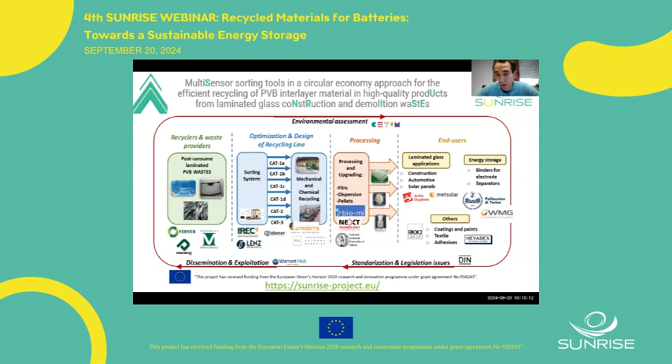This webinar will be about recycled materials for batteries. Indeed, batteries are a powerful tool to reach the energy transition and promote the sustainability of modern society. But for real sustainability, we have to take into consideration the materials and the processes for the production, use, and disposal after use of these devices.

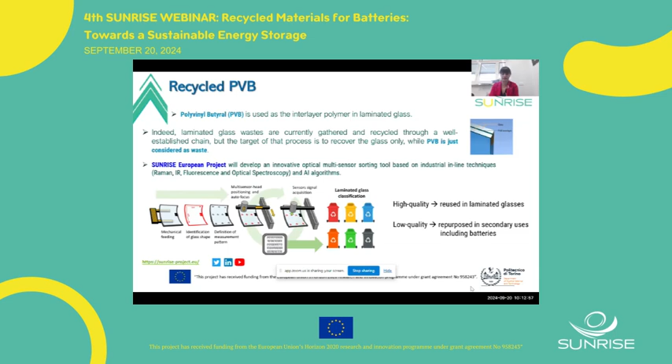We received some recycled PVB, provided by Lurederra, our partner in Spain. They provided this recycled PVB through some mechanical process, and the molecular weight, the OH percentage, and plasticizer content of this recycled PVB in different categories were determined.

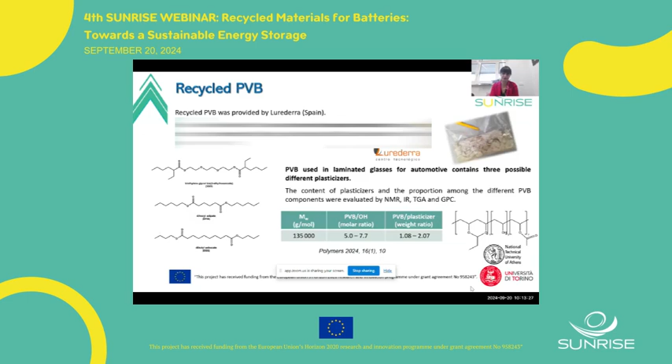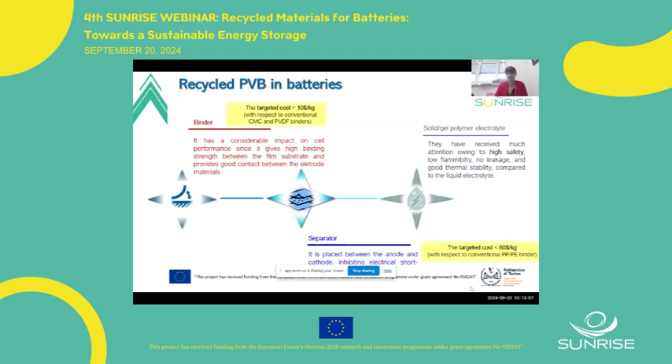Our goal as a partner in Sunrise is to use this recycled PVB as a versatile material, serving as binder, separator, and finally solid or gel polymer electrolyte. So in this presentation, I'll show results regarding first PVB as binder, then as separator, and finally as solid polymer electrolyte.

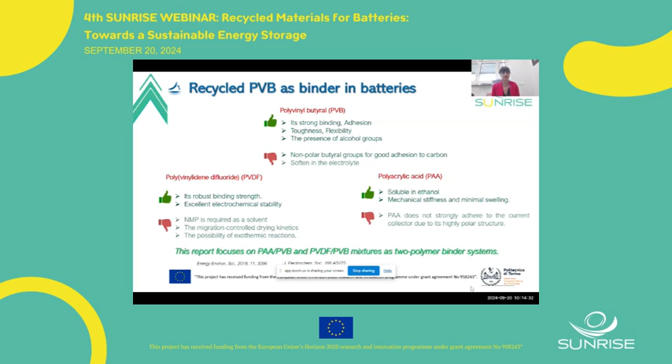First, using PVB as binder. While PVB has numerous advantages to be used as a binder, it cannot be used independently in the electrode composition. So this report focuses on a mixture of 20% PVB with other polymers like PAA and PVDF. We used PAA-PVB and PVDF-PVB mixtures as two polymer binder systems.

For sodium-ion batteries, we made some laminates based on commercial hard carbon, 90%, 5% conductive carbon, and 5% binder. The laminates were based on just PAA, the mixture of PAA-PVB at 80-20% ratio, PVDF, and then the mixture of PVDF-PVB at 80-20%. It is well known that hard carbon cannot be commercialized due to two problems: first, poor rate performance, and second, poor initial Coulombic efficiency.

As we can see, the performance of the laminate with the PAA-PVB mixture at 80-20%, the green one, shows the best performance in terms of rate capability from low C-rate to high C-rate, and also shows a very high initial Coulombic efficiency of around 87%. That is very good. However, for PVDF-PVB, the mixture shows worse electrochemical performance, the black one, especially at high C-rate. So we can consider the PAA-PVB 80-20% an efficient two polymer binder system, showing very good rate performance and very good initial Coulombic efficiency.

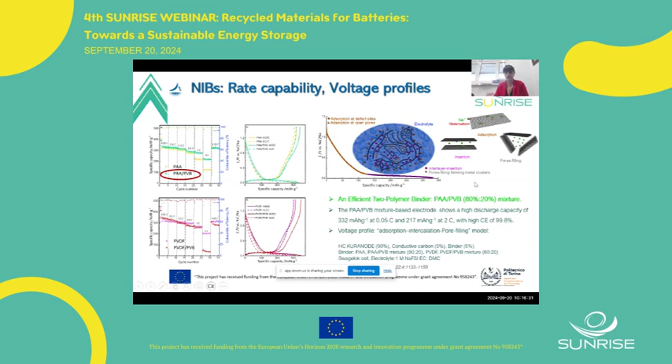The voltage profile of all the electrodes is shown, and we can see that in the sloping region we have adsorption, while in the plateau we have interlayer insertion and pore filling process for all the electrodes. The cyclic voltammetry for PAA and then the mixture of PAA-PVB is shown, which is in good agreement with the voltage profile shown in the previous slide.

Regarding the initial irreversible process, the PAA-PVB showed the lesser irreversible peak, which is in good agreement with the better initial Coulombic efficiency of this electrode. We also evaluated the cycling performance over around 800 cycles, and this electrode shows a capacity retention of around 79%, with very high initial Coulombic efficiency of 87%, and upon cycling the Coulombic efficiency reached 99.9%. That is a very good result.

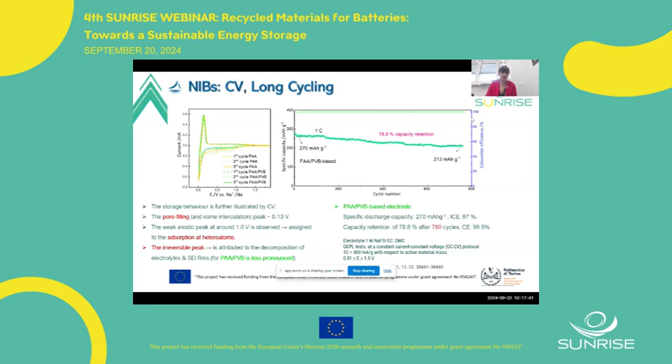I should mention that all of these were tried first with commercial PVB. Then I will also show results with the recycled one.

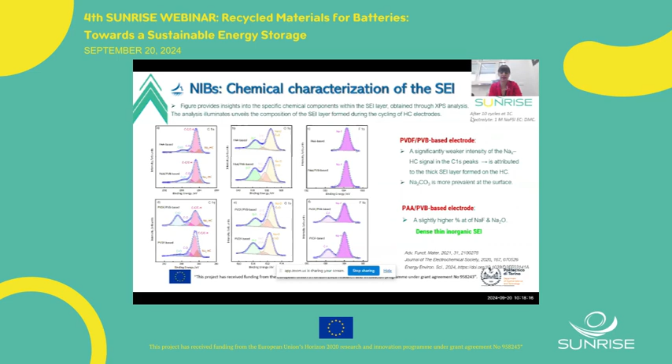In order to analyze the SEI, the passivation layer of all electrodes after cycling, we washed the electrodes and made some XPS measurements. We understood that the PAA PVB based electrode has a dense and thin SEI, while the PVDF PVB based electrode has a thicker SEI, which is why it shows worse electrochemical performance.

All the measurements were also performed for hard carbon with all laminates for lithium-ion batteries. As we can see, the PAA PVB based electrode at 80-20%, shown in green, shows the best performance from low C rate to high C rate, and also a very high initial Coulombic efficiency of around 74%, but upon cycling it reached near 100%, 99.9%.

Also, we tried to increase the amount of PVB to 50%, meaning PAA PVB 50-50%, but as you can see, the gray one, we lost a lot of capacity during the initial cycle. So it's not a good idea to increase the amount of PVB to 50%.

So again, an efficient two-polymer binder system is PAA PVB 80-20%. We also tried to evaluate the long cycling performance of this electrode, and as shown at 1C, the cell shows high specific capacity, very good initial Coulombic efficiency, and capacity retention of around 81% upon 850 cycles.

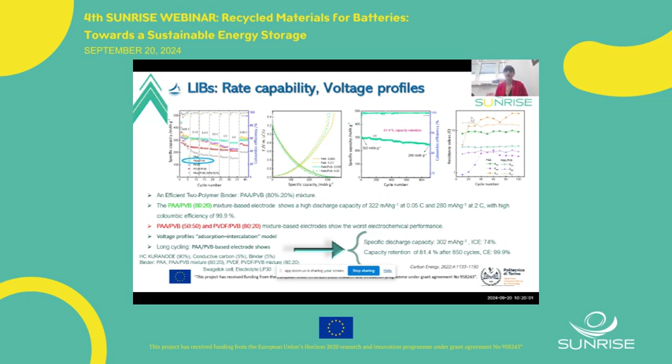The interfacial properties of the electrodes were also evaluated by impedance, and we understood that the PAA PVB based electrode has a more stable interfacial behavior.

Then we tried the characterization with recycled PVB that we obtained from Loureiro, our partner. As shown in the picture, it is the recycled PVB with some plasticizers, and we tried to make a laminate, again 90% hard carbon, 5% conductive carbon, and 5% binder with PAA and recycled PVB 80-20%.

As shown, the green represents lithium-ion batteries and the blue represents sodium-ion batteries. We can see that both electrodes show very good specific capacity, high specific capacity, and good rate performance from low C rate to high C rate.

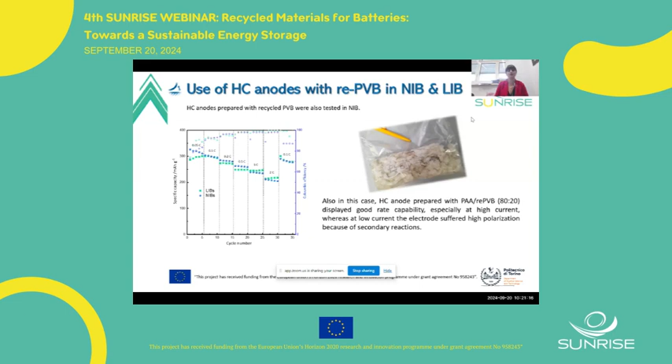However, we have some polarization during the initial cycle at low C rate, which could be due to the presence of some plasticizers. However, the results are promising for both sodium and lithium-ion batteries.

Now for the second part, we also used PVB as a membrane. In this case, we mix the PVB with NMP, add some isocyanate in a very low amount, and then let the solution stir to obtain a very uniform solution.

Then we increase the temperature up to 70 degrees. The slurry, the solution, is cast on the glass with a doctor blade, followed by immersion in the coagulation bath. Depending on the coagulation bath, we achieve two different morphologies, porous and dense, separated.

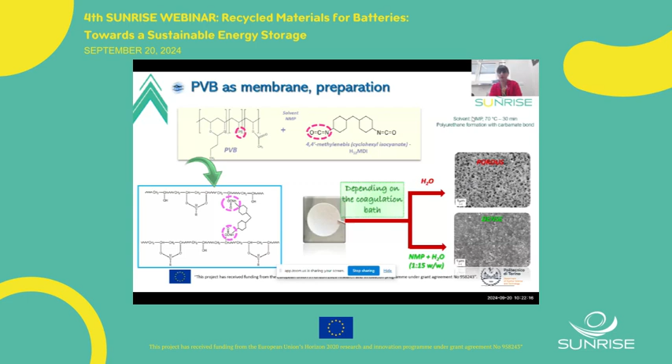So we tried to do some characterization. Some of them are shown, like uptake test, ionic conductivity, electrochemical stability window, which are very important for characterization of the separator. We tried to compare the performance with Celgard, the commercial separator.

Regarding the uptake test, the prepared membrane with PVB shows even higher uptake than the Celgard membrane. Regarding ionic conductivity, characterized by impedance, both porous and dense membranes show ionic conductivity comparable with Celgard.

And also the electrochemical stability window, which is very important for the separator, we can see that the separator is stable up to 4.7 volts.

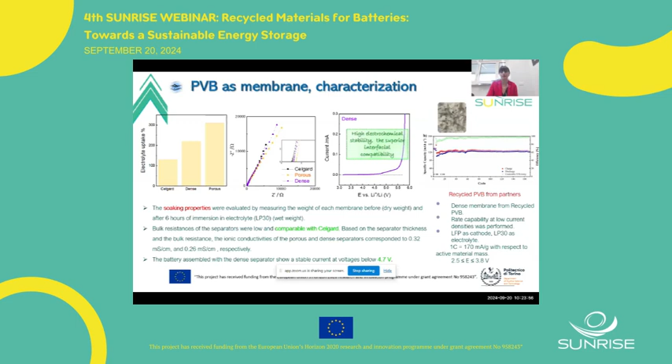We also obtained recycled PVB from the partner Loureiro, and we tried to make the membrane and do all the characterization again with the recycled one. We tried it in a half cell for lithium-ion batteries with LFP as cathode and lithium as anode, and as you can see, we could achieve quite promising performance with the recycled membrane.

At the end, I show the result regarding PVB as a solid polymer electrolyte. We use the solvent-free process, which is a promising and good process to make the solid polymer electrolyte membrane. In this case, we mixed PEO PVB with lithium salt.

The ratio is PEO to lithium salt at 15:1 and 21:1, with different percentages of PVB, 3% and 10% PVB. Then we mixed them without any solvent, followed by hot pressing at 80 degrees. Then in a symmetric lithium cell, we made some impedance measurements.

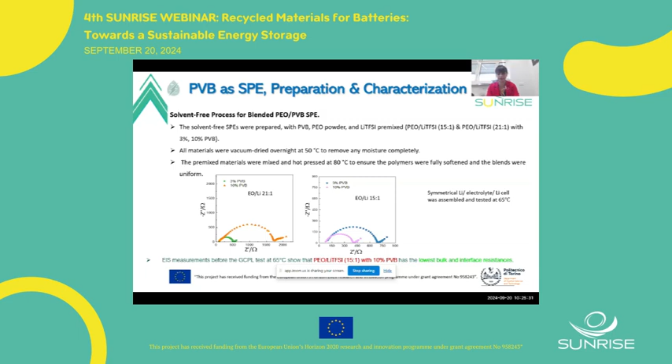As shown for PEO lithium 21:1 and PEO lithium 15:1, the PEO lithium 15:1 with 10% PVB, the purple one, shows the lowest bulk and interface resistance. So in terms of impedance, we understood that 10% PVB with PEO lithium 15:1 is the best percentage, showing the best promising performance.

Also, we performed stripping plating in the symmetric lithium cell at 65 degrees, and as we can see, again the PEO lithium 15:1 with 10% PVB showed the lowest overpotential value and very stable behavior upon very long cycling.

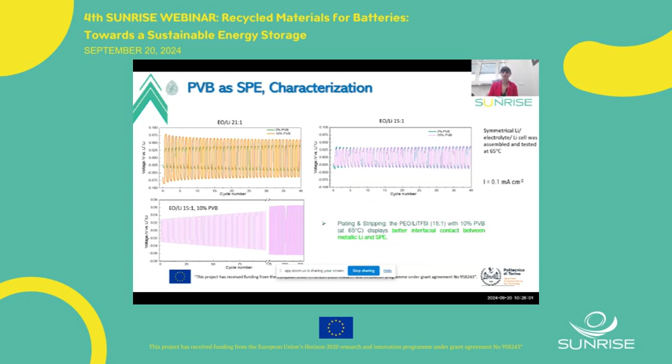As a conclusion, we tried to use PVB as binder, separator, and solid polymer electrolyte. For the binder, the mixture of PAA and PVB at 80-20% is the best composition, showing it could enhance the rate performance and initial Coulombic efficiency, good for both lithium and sodium-ion batteries.

Regarding using PVB as a polymeric separator, we could successfully prepare for lithium-ion batteries a light and thin PVB dense membrane, which has a good uptake percentage, ionic conductivity, and is very stable electrochemically. At the end, we also made PVB as a solid polymer electrolyte to avoid using liquid electrolyte due to problems of explosion and fire.

We could understand that we can enhance the electrochemical performance by adjusting the salt concentration and also by changing the percentage of PVB.

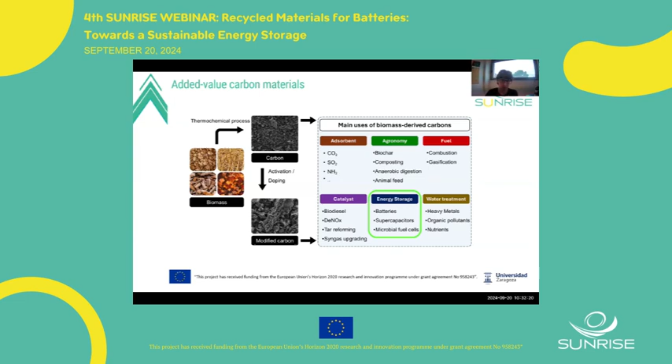Regarding the energy context and why we need to develop new battery systems: we have problems with global warming, the shortage of natural resources, and increasing energy demand. So we need to implement more renewable energy sources, and we need to store the energy produced through intermittent renewable sources, such as wind or sun, to be used when we need it.

Among other kinds of storage systems, there is the possibility to implement grid-scale battery storage systems. For now, as you know, the main batteries are lithium-ion ones, but they have issues such as limited resources, not only for lithium but also for other key materials like cobalt or natural graphite.

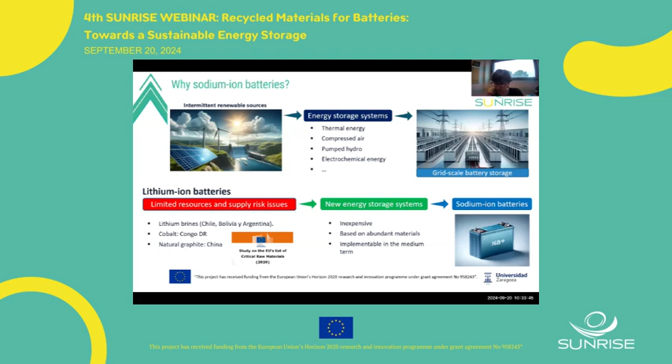So it's mandatory to develop new energy storage systems if we want to implement this kind of grid-scale battery storage for intermittent renewable sources. Among other alternatives, the most studied and most promising ones, as Hamid said before, are sodium-ion batteries. And among other challenges, one of the main bottlenecks to apply this kind of technology is the development of high-performance hard carbon anodes.

And for that, we need to rationally design this kind of carbon, taking into account the different sodium ion storage mechanisms. It's known that sodium can be stored in hard carbon through three different mechanisms: intercalation between the graphitic or pseudo-graphitic domains, adsorption in the functional groups and defects on the surface of the carbon, and also filling inside the porosity of the hard carbon.

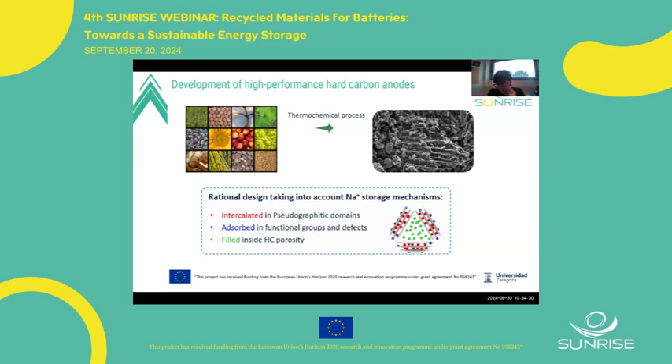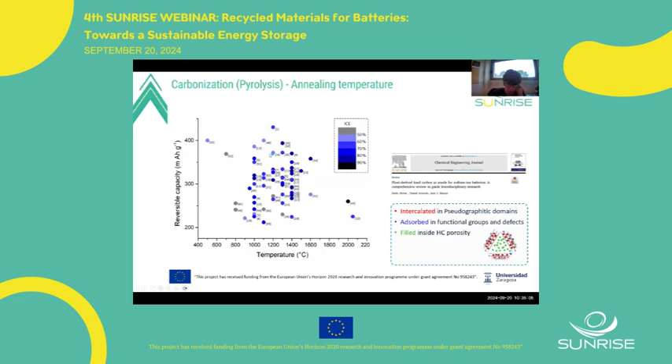So taking that into account, there are different studies in the literature. Here is a summary using different carbonization temperatures, making pyrolysis to the biomass to produce hard carbons. Depending on the biomass you choose and the temperature you select, there are different reversible capacities of the active material, so we need to optimize it for each kind of biomass. But we can also tune the hard carbon properties to improve the performance in batteries.

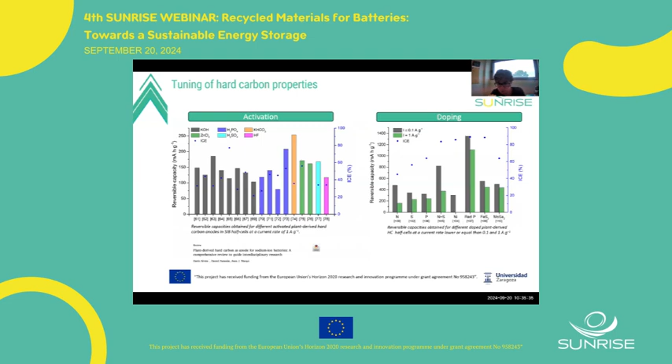For example, performing some activation with chemical agents, or also doping the hard carbon with heteroatoms or some metals, in order to improve the conductivity of the hard carbon and also to provide more active sites in which sodium ions can be stored during the cycling of the battery.

And I want to emphasize another kind of carbonization method to produce hard carbons, which is the hydrothermal carbonization of biomass. For now it was mainly studied to produce hard carbon from synthetic organic precursors, but we think there is great potential to use it with biomass wastes or agronomical wastes.

This process consists of the carbonization of the biomass in a closed vessel with water, mainly water, at low temperatures and under autogenous pressure. Inside, several reactions take place, such as hydrolysis, dehydration, decarboxylation, and polymerization reactions.

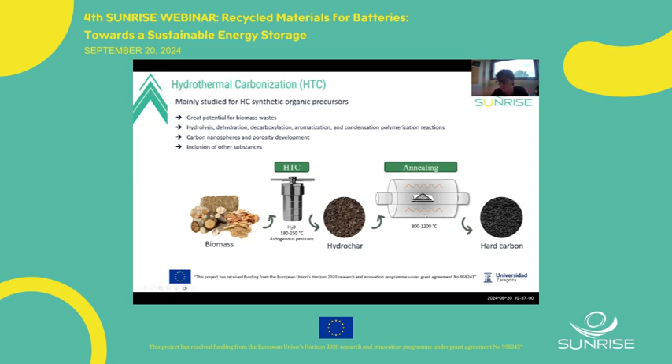And that gives rise to different morphologies in the carbon, such as the appearance of carbon nanospheres, and also the development of porosity. This process also allows us to include other substances to dope the hard carbon, for example metals. Then it's compulsory to perform another pyrolysis step and an annealing step at higher temperatures, in order to provide enough electronic conductivity to the material to be used in the batteries.

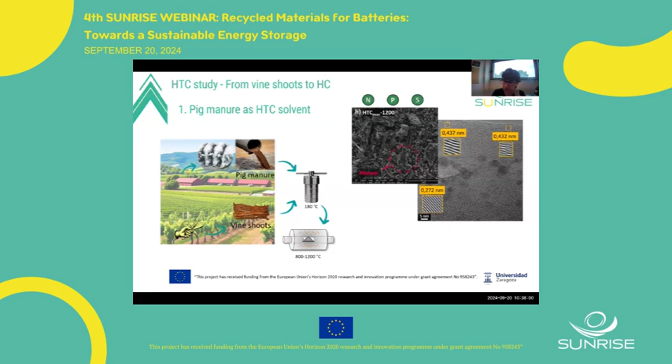To name some studies we have performed recently: we have studied how we can produce hard carbon from vine shoots, a residue from wine production, but using pig manure instead of water in the hydrothermal reactor, in order to recycle this residue, which has several huge impacts in the environment, but also to introduce heteroatoms such as nitrogen, phosphorus, and sulfur into the hard carbon. After performing these experiments, we obtain hard carbon with interesting morphologies, and also high quantities of nitrogen, phosphorus, and sulfur that should improve the performance when used as anodes in sodium-ion batteries.

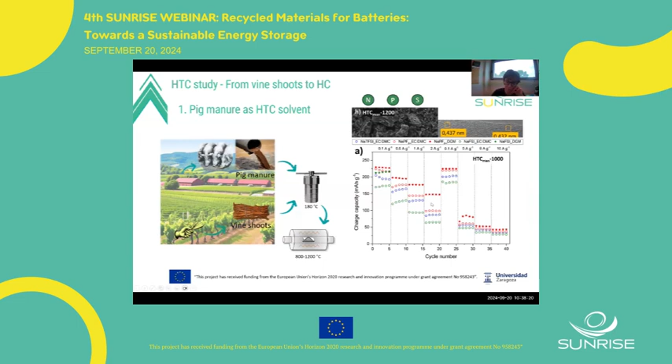When we checked this performance in half cells with different electrolytes, we obtained a relatively high rate performance for this material, much higher than for hard carbons we produce only with water. The next step we performed was to add some acids in the water solution in order to promote several reactions, mainly the hydrolysis of the biomass.

And also to dope the material with sulfur, nitrogen, and phosphorus. With this different hydrothermal carbonization, we obtained different morphologies in the hard carbons, with, for example, more nanospheres or more 2D regions, more ordered ones or less ordered ones, and also inclusion of heteroatoms and the development of mesoporosity mainly.

So when we checked this material in sodium-ion batteries, we obtained higher rate capabilities than what I showed before, demonstrating that this kind of hydrothermal carbonization with acid catalysis is positive for the production of hard carbon for sodium-ion batteries. And the last thing I want to show you is that we can also add, through this process, some metallic nanoparticles on the hard carbon surface.

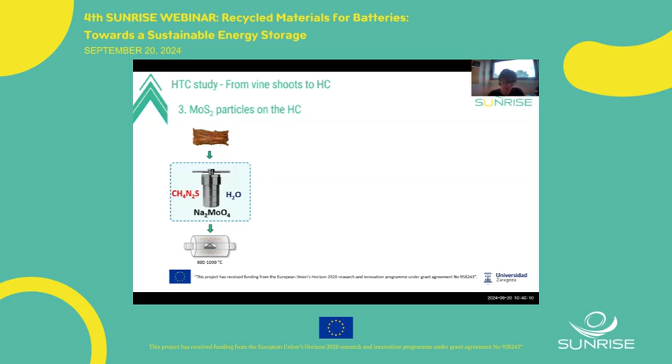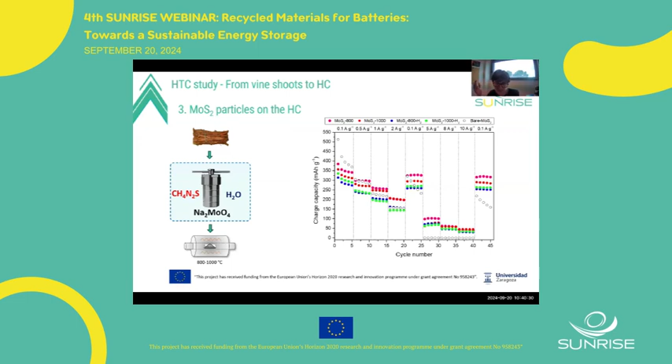After showing these possibilities, I want to conclude by giving an overall situation of hard carbon production. There is still a lot of work to do because each plant-derived biomass gives rise to completely different materials. So selecting the proper ones is a huge challenge, but also selecting what kind of thermochemical process we want to use, for example hydrothermal carbonization and pyrolysis, and also all the pre and post treatments we can use, such as temperature processes, activation, doping, and others I have not mentioned here because we don't have time to go inside.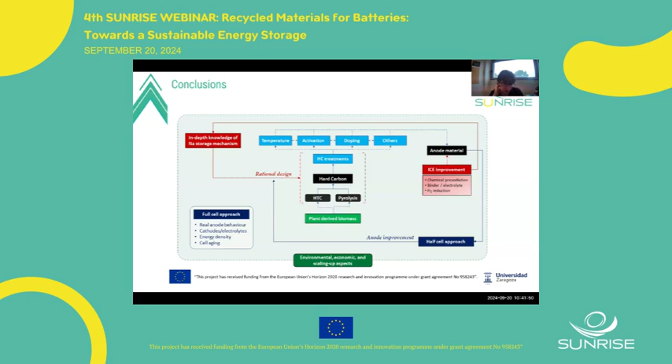We also need to take into account that the hard carbon anode material is only a part of the battery, so we need to study very well the interaction between the different parts of the battery - electrolyte, separator, as Amida said before, also the cathode. So it's necessary to perform rational design of all the materials together in order to achieve high quality sodium-ion batteries in the near future. So that's all.

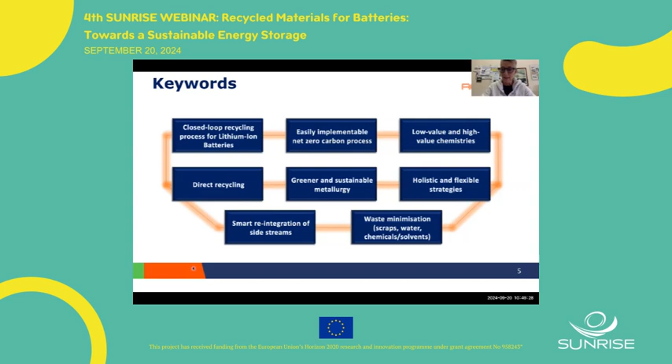The main ambition of Renovate is to address circularity in order to maximize the profitability of the recycling process we are going to propose and develop. This means thinking about innovation in recycling, which we know is a more or less established stage, but we are thinking about long-term research, something new that we can bring to this field.

Without losing focus regarding the legislation and what the regulatory framework is asking in terms of targets, but this somehow supported by digital monitoring and control, so we are going to contribute to create and develop a new digital architecture in order to have a clear and transparent digital platform, and last but not least, sustainability and safety assessment by means of life cycle assessments.

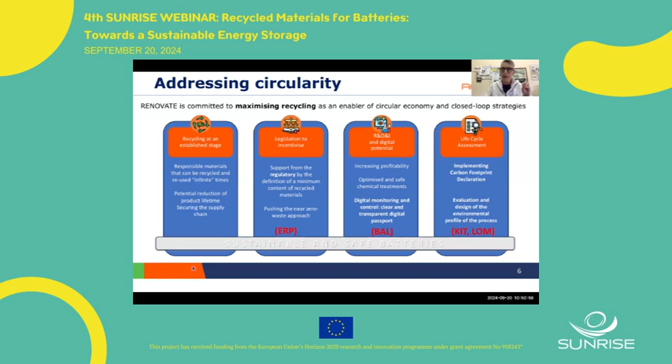This is in order to feed the database in terms of recycling information, for example regarding the carbon footprint declaration, which is one of the most hot topics that JRC is also taking into account. So we have on board partners which are involved in the digitalization aspect and also in the sustainability assessment.

The main motivation of Renovate is to try to contribute to establishing a resilient supply chain to boost European strategic action in this regard, which is really important and crucial for Europe because, as you know, we are heavily dependent on third countries for the supply of basic materials necessary for battery manufacturers.

That's why the European Commission is putting a lot of public money into projects in this field, for example not only BEPA, the battery partnership, but also other European platforms like the European Raw Materials Alliance and also the interregional innovation investments.

So there are a lot of funding tools, not only for innovation action, so for higher TRL projects, but also for long-term research, because recycling is really important.

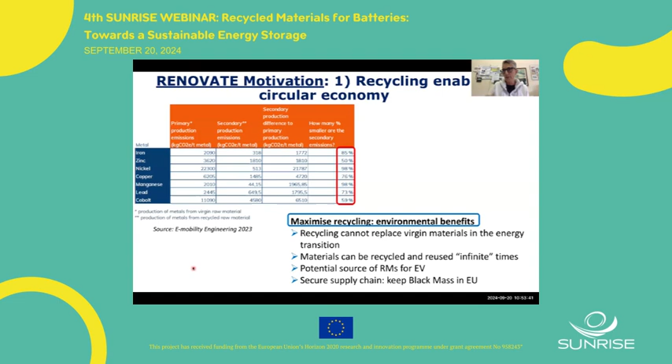...secure the supply chain by keeping in Europe the black mass, which is a really big treasure, because it's a potential source of raw materials not only for electric vehicles, since we are strongly focused on electric vehicles, but we should also take into consideration that we have a lot of batteries in storage applications.

So, of course, you know this is a quite known picture that we have. Maybe in the near future we will face a lot of batteries that will go to end of life, or, for example, to repurpose or reuse.

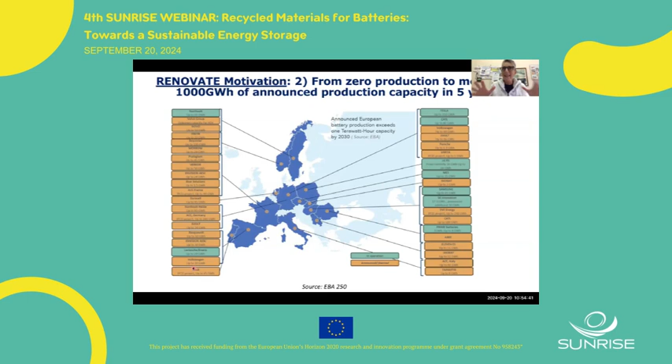There is more or less 1 terawatt-hour of announced production capacity by 2030. This is a quite tunable number, because maybe more or less half of such capacity will really be set in place. But if the Green Deal is addressed, we will have a lot of batteries produced in Europe, which means we need to secure such supply chain as mentioned before. The number of gigafactories announced in Europe will also call for high investment in the recycling field, with expected high revenue from an economic point of view.

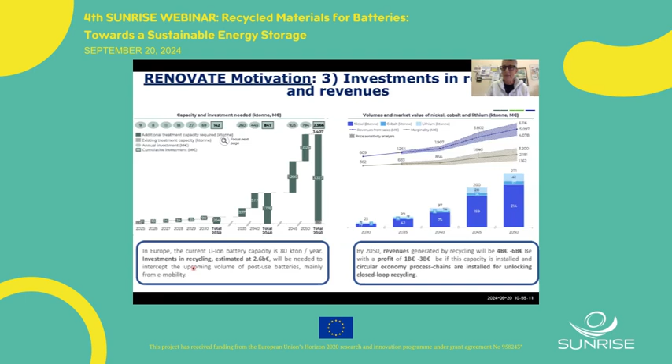Especially if closed loop recycling can be unlocked, which is really crucial in terms of circular economy. Why? Because closed loop substantially means recovering and extracting the critical raw materials from the batteries during the recycling process, and using them as secondary materials in the production of new batteries. This will bring a positive impact on the European ecosystem, somehow buffering our dependence on primary battery material sourcing.

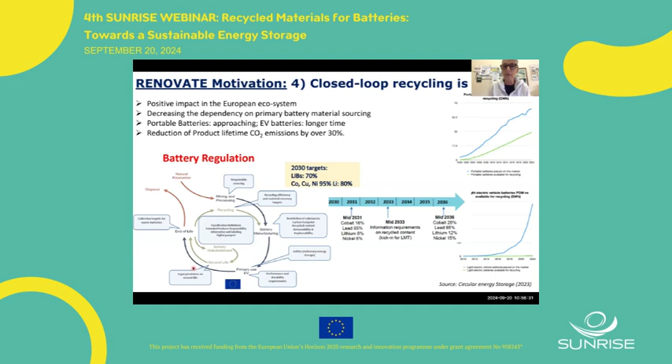We are more or less ready for what concerns portable batteries, and we are now slowly approaching EV batteries in a longer timeframe, with positive impact on product lifetime carbon emissions by over 30%. This is quite clear in Europe, and in fact the updated battery regulation is asking us for mandatory use of recycled content in the production of new batteries starting in 2030 or 2031.

So recycling is one of the basic pillars for making more sustainable batteries, occupying a really important place in the battery regulation. However, the battery regulation is also asking for really challenging targets, especially in terms of recovery targets for specific materials. And even if recycling is already at an established stage, there is a lot of room for improvement that science and technology can address.

So there is a need for a lot of new research in order to improve the profitability of recycling, for example working on chemistry adaptability to improve all the pretreatment steps in terms of safety - so safer deactivation, automation, and robotics in disassembly of the batteries. Of course, we also want to implement digitalization in the recycling steps, looking at net zero waste in such technologies, and implementing life cycle assessment, which still lacks some data, especially in the cradle-to-cradle approach.

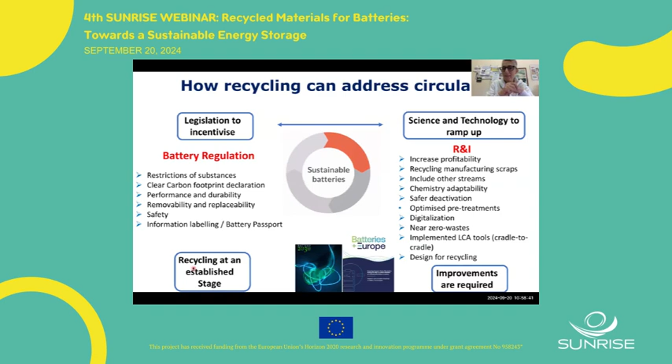And of course, design for recycling - looking at new materials that can be easily recyclable in the early stage of battery design and manufacturing. As mentioned in previous talks about new materials that can make batteries easily recyclable, it's important to have long-term research, and Renovate has some key innovation and ambition aspects across the 3 years of the project life.

The first key innovation we are going to propose is to implement and develop new and innovative separation technology, preferring disassembly over shredding processes. This is because it's important to have more value within the circular lithium-ion battery supply chain with simplified downstream processing. So the improved separation will allow higher quality materials by reducing the purification steps.

This kind of technology is high voltage fragmentation, which will be implemented by our partner, the Polytechnic University of Milan. This technology will allow separation of the conductive metallic foils, separators, and other plastics from the active materials - both cathode and anodic - in order to have high quality black mass that can then be further managed and treated for material recovery.

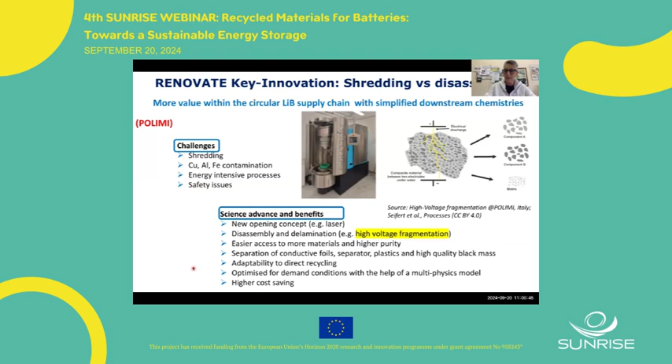Another important aspect we are going to implement from an innovation point of view is the recovery of non-active materials, non-electronic components. It's important for us, in order to enhance recycling profitability, to recover graphite, for example, but also binder and electrolytes.

This is because such components are really important from an economic point of view. But also, if you think about graphite - if it's burned out, there's a negative impact on the carbon footprint. And the binder, especially polyvinylidene fluoride, a fluoropolymer, if not properly managed during the recycling stage, can cause the emission of hazardous products, like for example PFAS.

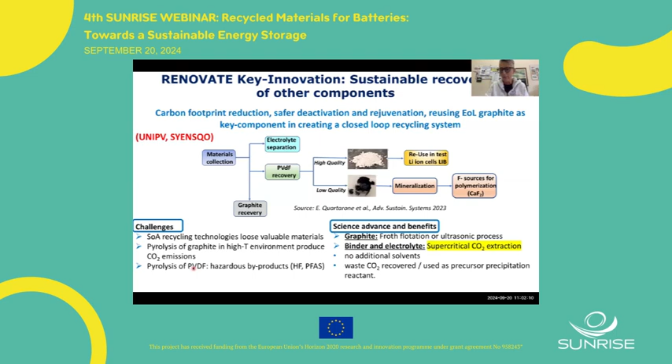So we are going to recover them for both environmental and economic reasons, using sustainable techniques, like flotation in case of graphite, and supercritical fluid extraction for binders and electrolytes, because in this case we also have the possibility to recover waste solvents that can be reused for other applications, for example as a precipitating agent using CO2.

The last innovation point I want to highlight, because it's the core of the process, is the implementation of direct recycling. Direct recycling means recovering, through regeneration and healing strategies, especially the cathode active materials, in order to avoid the metallurgic approach, which consists of several steps that have an impact from an economic and environmental point of view. So we can directly heal the cathode by adjusting the regeneration and morphology, for example the lithium stoichiometry, because we have physiological lithium loss.

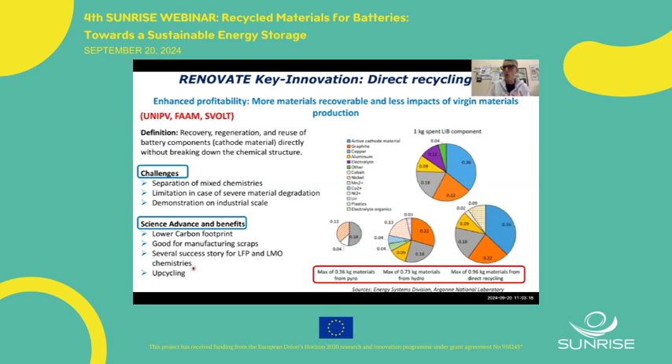This really fits the LFP-based chemistry, which is now considered a low-value chemistry. So it's really hard to justify a hydrometallurgic or pyrometallurgic approach when we just want to recover lithium iron phosphate.

The recycling of LFP is really important now because there is a growing demand for this kind of chemistry, even in electric mobility. So substantial capacity dedicated to LFP recycling is growing quickly, especially in China and South Korea. There will be 48 companies by 2026, which is a huge number, even higher than the availability of manufacturing scraps that can be recycled today.

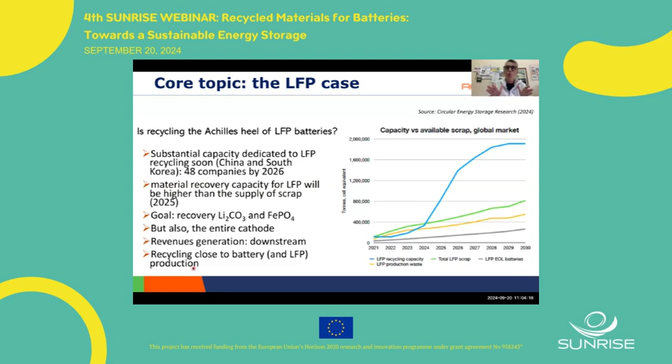The goal is to recover lithium and phosphate, I mean carbonate and phosphate, but also to start working on the scaling up of direct recycling, which is currently only working at a lower technology maturity level.

Just to skip ahead, because time is running fast, we are happy to work on a project that is really well integrated in a cluster with other recycling projects with higher TRL, in order to accelerate the scale up of the outcomes coming from Renovate, which we are coordinating. Renovate is a low TRL project, with a TRL of 4.

We are developing emerging technology, especially direct recycling of LFP, but also recovery of other components. These results can also be integrated into another project where we are partner, Automat, which is a higher TRL7 project focused on developing advanced disassembly, deactivation, discharging and sorting solutions, supported by digital decision systems.

Finally, there's also a sort of validation of our process in BATMAS, an Interreg project, a large project funded by I3 Instrument, which is the first project that will implement the first European circular battery valley, with the deployment of breakthrough green technologies around 4 demo lighthouses with very big partners like Orano Mining, Verkor, and so on.

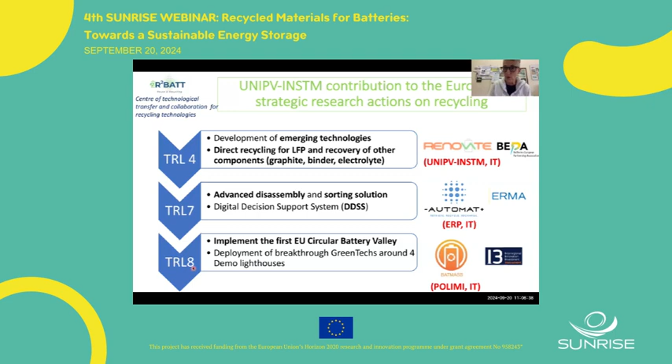So it's important to say that activities like this one, clustering activity from a dissemination point of view, but also technical exchange of knowledge, is really important in order to accelerate the scale up of new, innovative, and more sustainable recycling technology.

So I think this was my last slide, in order not to take too much time. I kindly invite you to join us on our journey, and I thank you again for your kind attention, and I thank again the SUNRISE teams and the friends for having me today.

Thank you again. Thank you very much, Professor Quartarone, for this very inspiring presentation, and thanks to all the speakers for giving us this very nice overview of the topic, from lab scale to the whole European scenario.